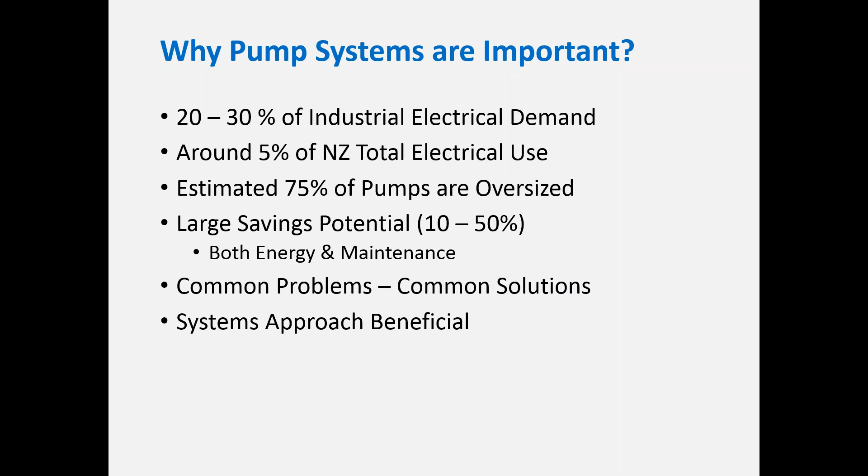There's large potential savings by sorting out these problems, and these problems are quite common and widespread, so they are fairly easy to solve if you're willing to put in a bit of time and effort. It's also important to view pumps not just in isolation, but to recognize that the pump is part of a whole system, including piping and control and other things. Taking a systems approach is really important, not just focusing on the pump. Today we're actually going to focus a little more on the pump itself, but remember that oversizing of pumps has to do with not really understanding the system well. We'll talk about that as we go through.

I keep putting this slide up around the study to show this is a big problem in industry. Many of our pump systems are affected by low pump efficiency and a lot of downtime due to maintenance. Things like seal leakage are really all symptoms of oversized pumps and off-design operation of our pump systems.

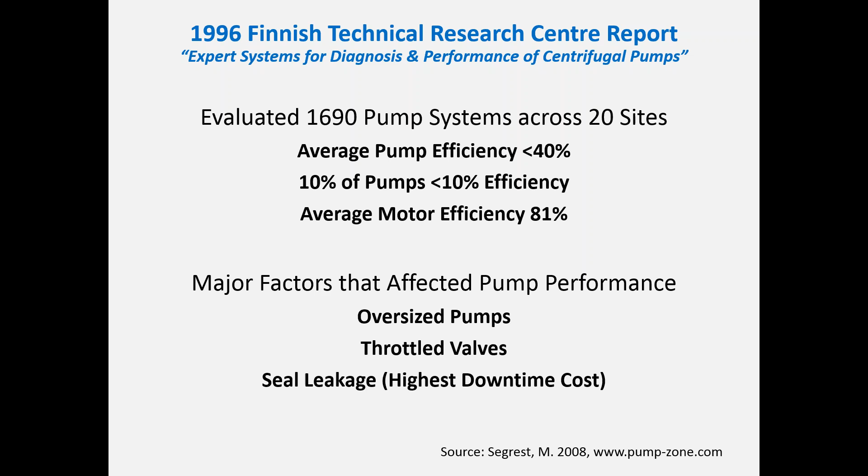So let's talk about what we mean by off-design conditions. What I'm going to do briefly is review our pump curve here. Sorry if this is going back to basics for some of you.

All of our pumps will have a pump curve, and it may be buried away in the archives, but this becomes a very useful, important piece of information to have. If we look at a pump curve in more detail, what it does is express where the pump will operate as a function of flow rate versus the head, or pressure, delivered by the pump.

In this particular case we have different impeller sizes, and that's the performance curve for each impeller size. Then we have these lines here - let me bring up my highlighter - these lines are lines of constant efficiency.

Okay, so if we're on that line - this line here, which is not always to be found, is the minimum flow rate that we need for our pump. If we operate below that line, there can be some very negative effects. We'll talk about that in more detail, but recognize that there is a minimum flow you need to operate your pump at.

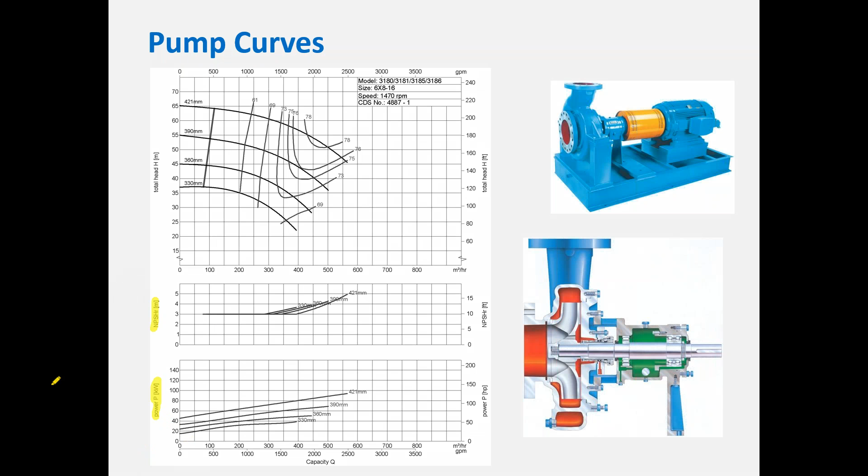So what the pump curve does is tell us about the performance of the pump and also its efficiency. Going back one slide, typically there's also information about the required net positive suction head for the pump as a function of flow rate, and often the power requirement as a function of flow rate as well. So there's a lot of information to be found on these pump curves.

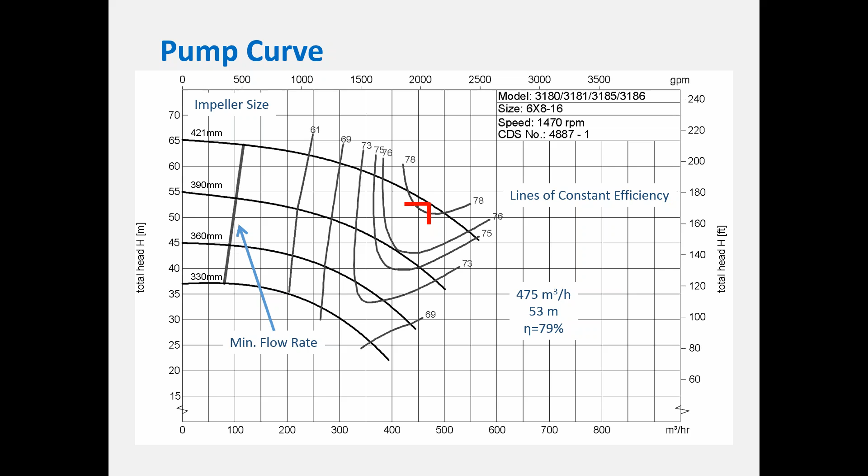And obviously we're operating at a point on that curve. For example, this is the best efficiency point on this curve, which happens to coincide at 475 cubic meters per hour. The head the pump will deliver is 53 meters, and the efficiency is around 79% - that's the pump efficiency. As we move away from that point, our efficiency drops, our flow rate changes, and our head requirement changes. We only operate on that particular curve.

Now the trick is to know where we're actually operating. The first thing to recognize is that we always operate at the intersection of our system curve and our pump curve - that is the operating point. Depending on what our system looks like, whether we have valves open or closed, that will change the system curve and change our operating point.

And we only move up and down the pump curve as we... sorry, I got muted for some reason. Can you still hear me okay? If you can't, please send me a message. Okay, thanks.

Okay, so we will only ever operate along the pump curve where the system curve intersects the pump curve.

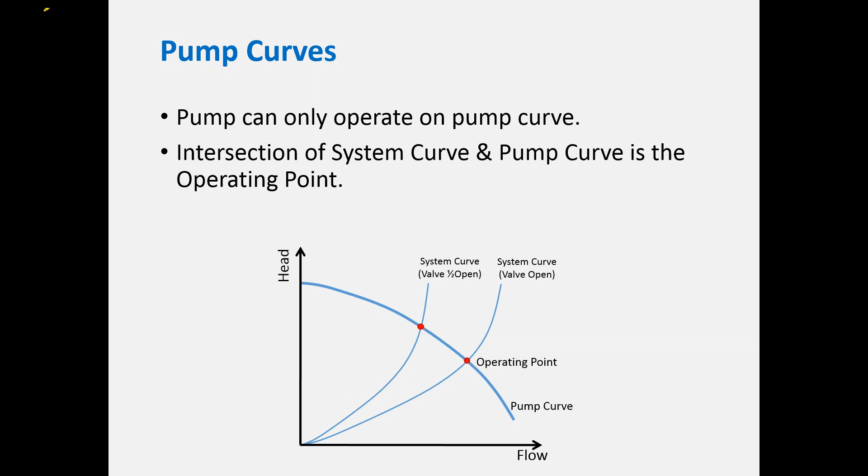So what we need to do now is define some different operating modes. We talk about continuous operation of a pump, where you can run the pump continuously and expect many thousands of hours of operation without any real damage or excessive wear of the pump or its components. Pumps are designed to operate thousands of hours without problems - that is continuous operation. We'll come back and talk about that in a moment.

Then we have what we call short-term or intermittent operation, which occurs during upset process conditions or abnormal operating conditions.

So we're really operating away from our design point, and what that does, and we'll see why that is a bit later on, is actually introduce premature wear into the pump because the flow within the pump and to the pump are not ideal. It hasn't been designed for those conditions, and as the name suggests, this is short-term or intermittent.

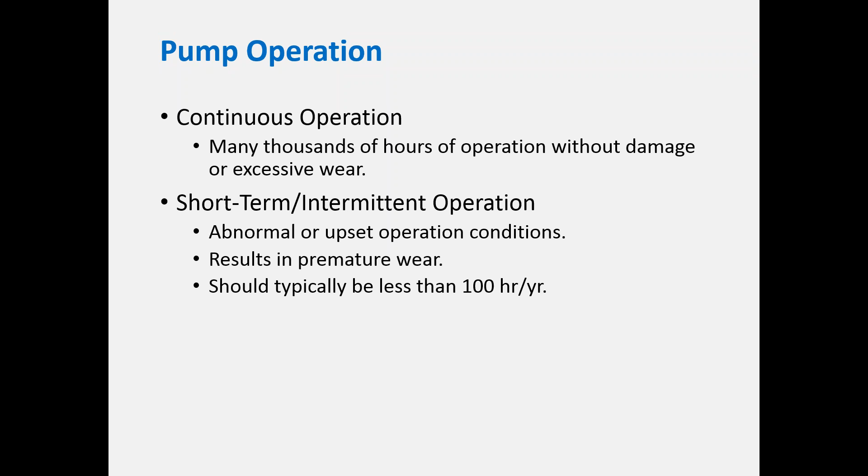So we wouldn't expect long-term operation under these conditions. People define what they mean by short-term operation differently, but typically you'd expect it to be around less than 100 hours per year. It may be more, it may be less, it really depends, but the concept here is we have continuous operation where we operate most of the time, and then we have these startup, shutdown, and upset conditions, and we really want to avoid operating there longer term.

The other third operation condition is minimum flow. As we said before, all pumps have a minimum flow that they need to see, and what that flow rate is really determined by three main criteria.

One is the temperature rise that we will get in the fluid, and we'll talk about that a bit later. The second is hydraulic consideration, so things like vibration and excitation forces.

And as we go through, we'll talk about non-ideal flow conditions, so the flow that is occurring in the pump when we have this reduced flow, especially below the minimum flow rate of our pump, and that can put huge stresses and vibration onto the pump because of the flow that's going on.

And then the third one is once we reduce down close to or below our minimum flow rate, the amount of cavitation can increase quite drastically, and the intensity of it also. So we can do some major damage to our pump, both the impeller and the housing, as we go below this minimum flow rate.

And so often that minimum flow rate is actually specified in the pump curve, but if it's not, there are some rules of thumb that you can then use to avoid that.

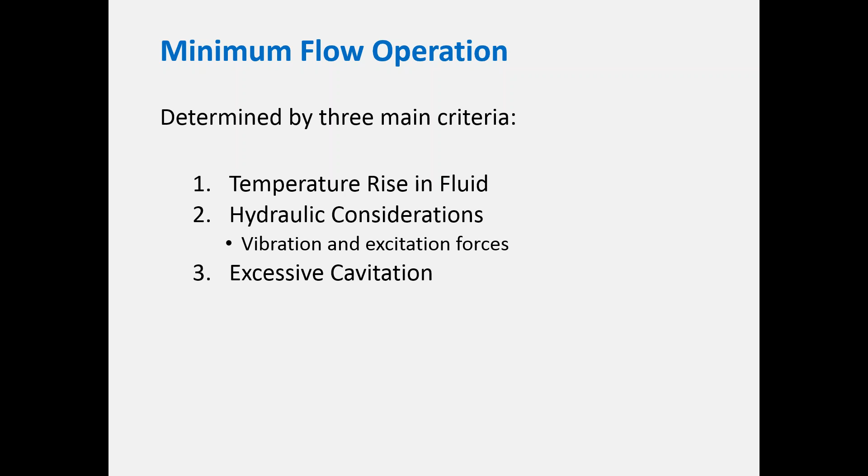So when we do our design of our pump system, we need to select a pump, and so for our flow rate and our head requirement, we have our pump operating at that best efficiency point or very close within that range there.

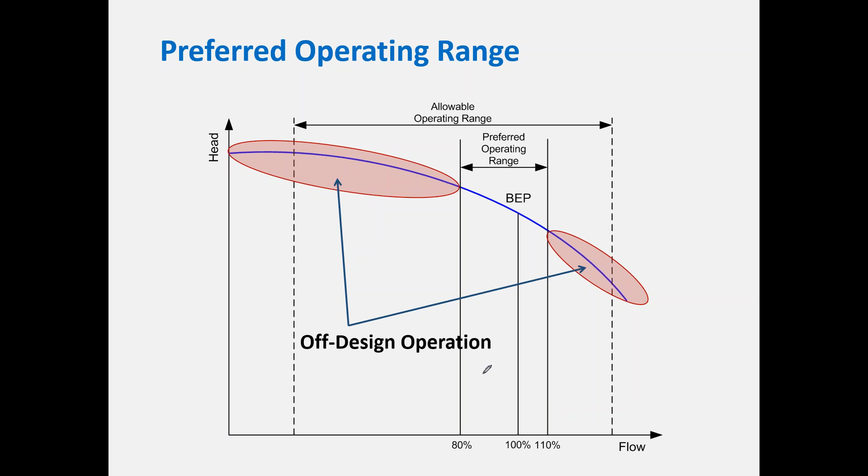So as I just said, for continuous operation, most of our operation of our pump system ideally should be in that fairly narrow range on our curve there.

For short-term operation, this is actually a very small percentage of the total operating time, things like startup, shutdown, process upsets, things like that. We can operate in these regions here without too many negative effects, as long as it's short-term or intermittent.

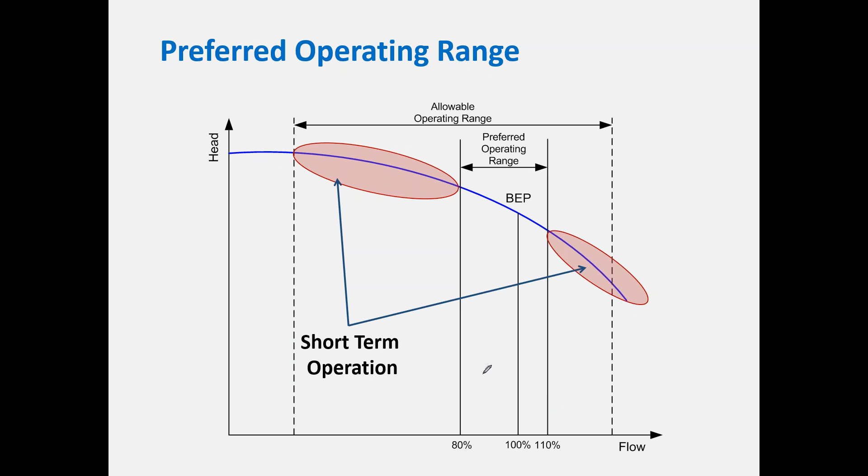So that's really short-term, and obviously we want to avoid being in this region here below our minimum flow. If we're operating in that, then that's bad news, and we actually need to design systems and control measures in order to avoid that. For example, often a bypass will be installed in order to make sure that the minimum flow rate is obtained even when process demand is lower.

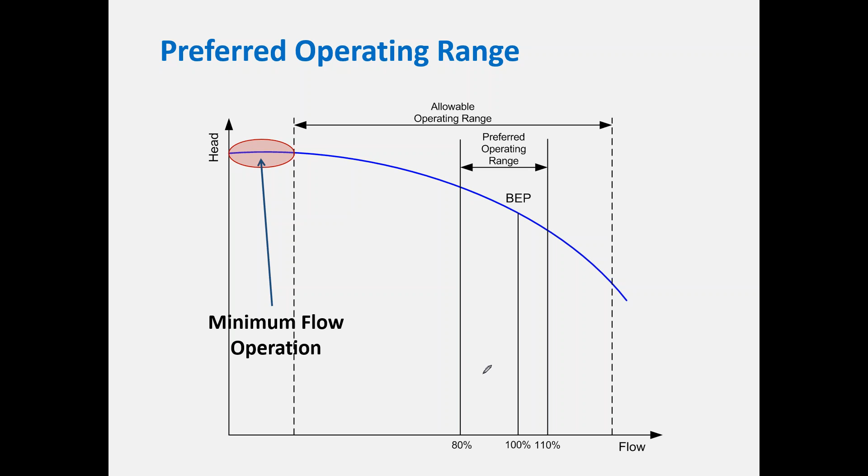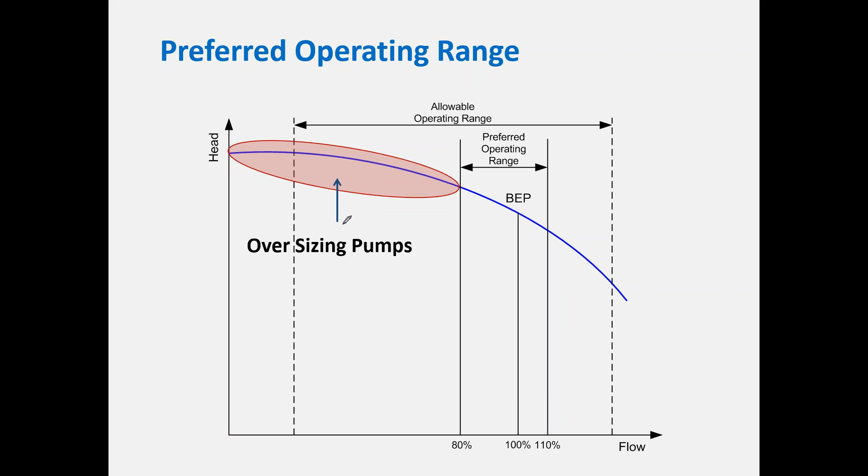Now, we talked before about oversizing and how that's a major problem. Basically, when we oversize a pump, we end up operating somewhere in this region here, and that becomes a problem. We'll talk about the effects of oversizing and these non-ideal flow conditions.

So before we move on, let's talk about why so many pumps are oversized and we actually end up operating continuously outside of our preferred operating range.

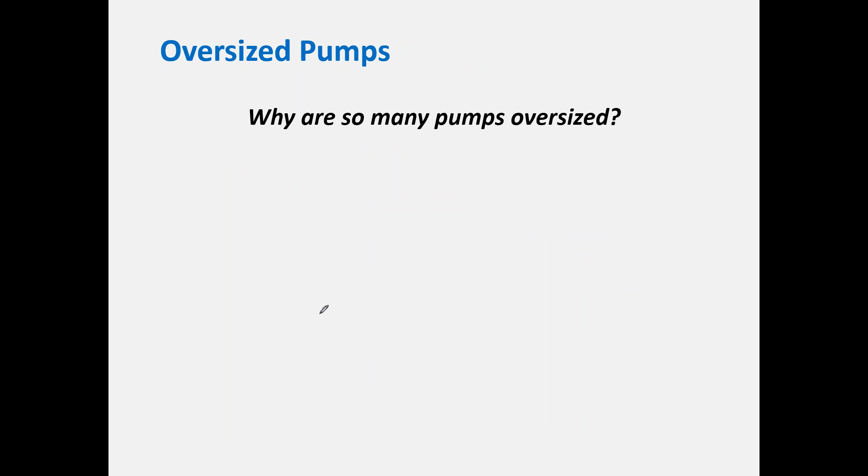First of all, often designs are future-proofed, because we're going to expand our production facilities, or demand will expand in the future, so we size a pump that is bigger to anticipate any future production increase. Now that may or may not happen, but a quick life cycle or total cost of ownership analysis can show what the actual economic cost is in oversizing a pump for the future.

And often what you find is there are ways that you can still achieve good operation of your pump and also future-proof your design. For example, you may specify a larger pump housing and have a smaller pump impeller that can be increased later on, and you can quickly do the cost-benefit analysis of that if it's a real issue.

But often that's put up as a bit of a smoke screen. The second one is safety factors or anxiety factors, where we're not too sure what our demand is going to be, and often that has to do with the head requirement. Our flow requirements are usually fairly well defined, so if we're not careful, safety factors can be added in, especially if different people along the chain, like the design engineer, the consultant, and the supplier, each add their own safety or uncertainty factors. Then we can very quickly end up with an oversized pump, and it doesn't take too much additional safety factor to get quite far away from the best efficiency point.

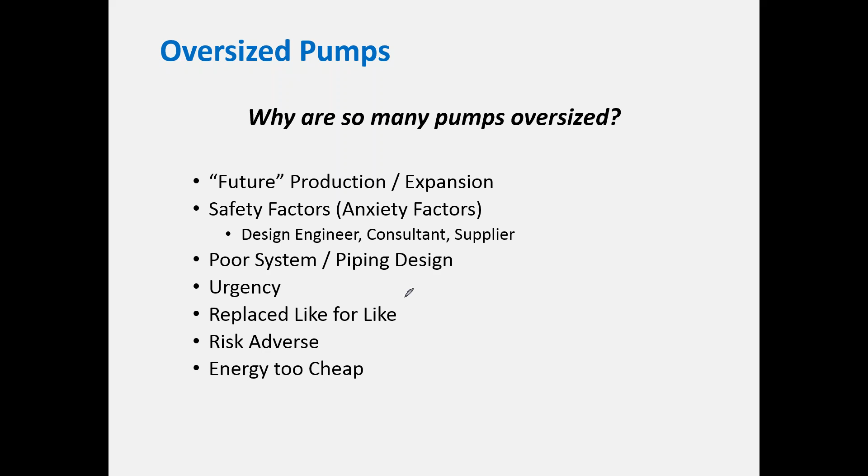Certainly, if you put a VSD on an oversized pump, especially for a new build, then there's a lot of extra capital tied up that doesn't need to be there with a correctly sized pump. That's something we're going to talk about a little more later in the year—the advantages and disadvantages of variable speed drives, and when they're ideal versus when there are perhaps more efficient and cheaper options. But that's a good point, Paul, and we'll get to that a bit later.

Now, previously, when we've talked about identifying pump systems that are potential candidates for energy reduction, we've talked about some indicators for inefficient systems, things like throttled pumps, pump systems with bypass or recirculation, multi-pump systems, etc.

The ones I've highlighted in bold here—throttled pumps, cavitating pumps or valves, high vibration, noisy pumps, pump systems with high maintenance requirements, and systems where flow or head from the pump have degraded over time—these are actually indicators that you're operating at these off-design conditions long term. This isn't just short-term operation; you're actually operating away from that preferred operating range longer than you should be.

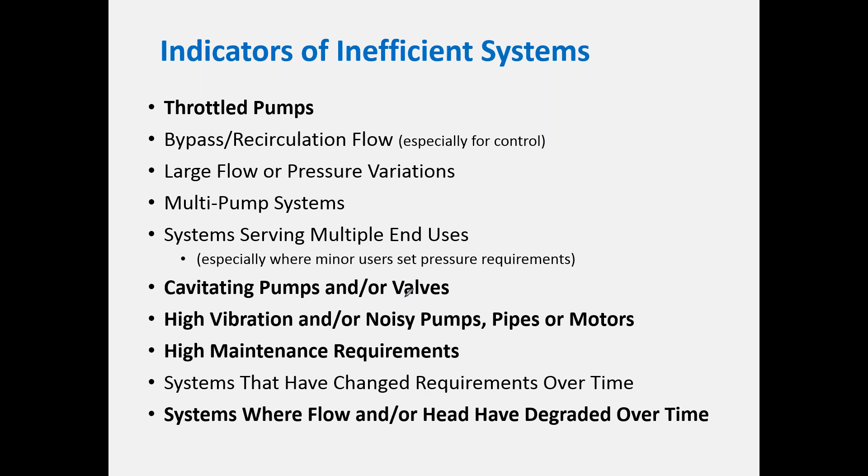When you operate your pump at these off-design conditions, there are a number of non-ideal flow conditions that occur within your pump. We'll talk about those, but if you think about pump design, what the pump designer is actually trying to do is design a pump that is robust and reliable, but that will operate at a certain point in the most efficient manner.

So what they try to do is minimize the losses in your design. There are a number of different losses that make up why we have a pump efficiency: mechanical losses, leakage losses, recirculation, and hydraulic losses. We'll briefly go through each one of these.

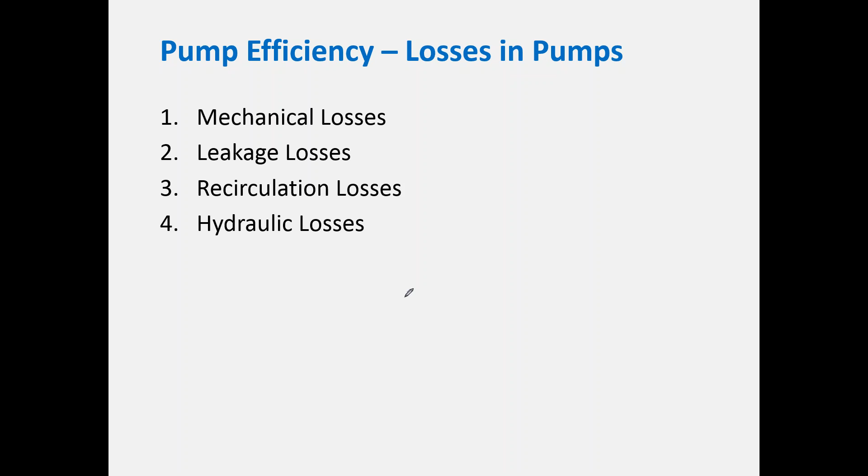Mechanical losses are things like mechanical friction in your bearings, your seals, and all of the mechanical components. There are frictional losses to do with that.

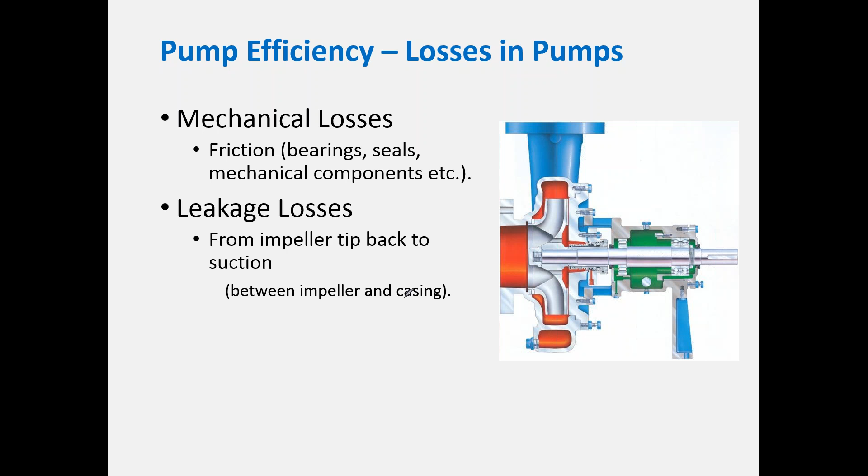The second type of loss is leakage losses. You actually need some clearance between your impeller and the pump housing or casing, so there is a small amount of fluid that leaks between the impeller and the casing. But in the design of the pump at a certain flow rate, you're trying to minimize those leakage losses in order to improve pump efficiency.

The third type of loss has to do with recirculation. You can get recirculation of fluid within both the suction or inlet of the pump impeller and also the discharge, because of velocity differences between the impeller and the vanes and things like that. That is another form of loss, and the designer is trying to minimize those.

And that is how we get this best efficiency point. Then finally we have hydraulic losses - this is all of the friction between the fluid and all of the components of the pump. It's sort of analogous to pipe friction. We have all of these frictional hydraulic losses due to pump fluid interaction. When the pump is designed, those factors are trying to be minimized in order to have the maximum pump efficiency.

But as we move away, obviously the pump is fixed, and so as we move away from that best efficiency point, these losses are going to increase. Especially things like recirculation and leakage losses tend to increase as we move away from this best efficiency point.

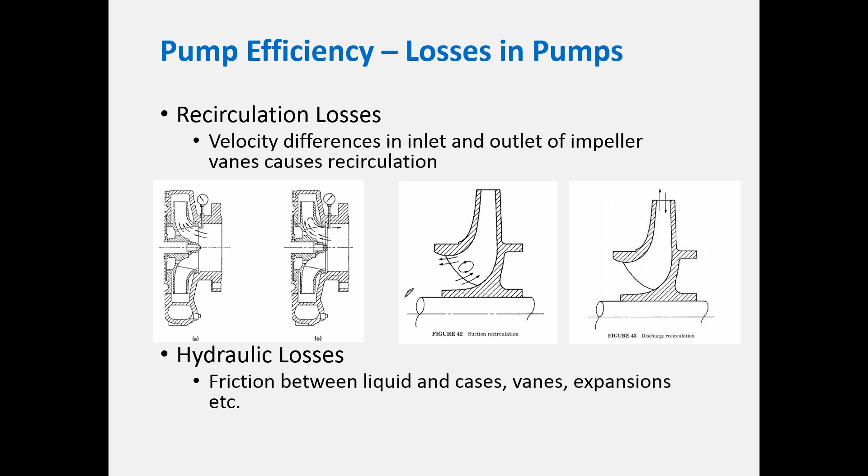So there are six things that arise from these off-design conditions, this non-ideal flow. We'll talk about each one briefly. One, we operate at less than our best efficiency, and there are some energy consequences because of that. We'll talk about radial thrust - we change the forces that actually act upon the pump and the impeller itself. We'll talk about temperature rise in the fluid, especially below this minimum flow.

The fourth one, which is really a big one, is around internal fluid recirculation within the pump, we'll talk about that. With high specific speed pumps, so these are your axial pumps, your motor can become overloaded pretty quick, and we'll talk about why that is. And then finally, if entrained air or gas is an issue, operating at non-ideal flow conditions can aggravate that, and we'll talk about what the effects of air in your pump is.

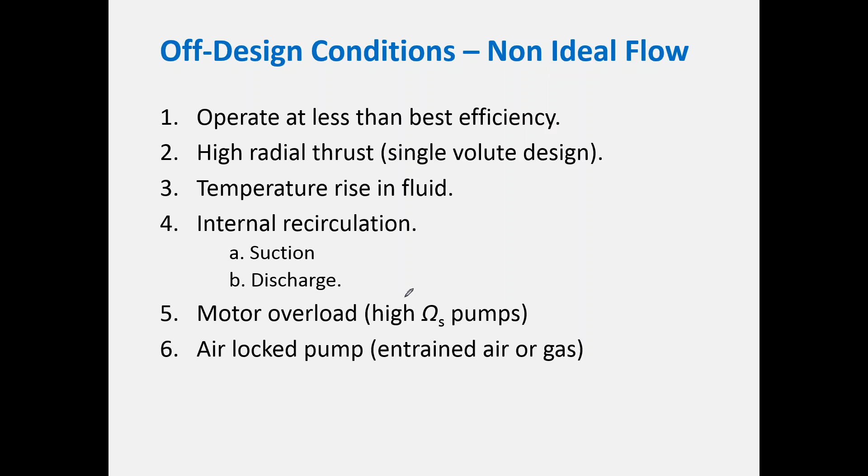So first of all, as we operate at these off-design conditions, we move away from our best efficiency point, and so we're going to use more power or additional energy than needed in order to pump our fluid. There is an energy penalty which ultimately leads to an additional cost.

This is suboptimal operation, and there is a financial cost of operating away from here, not just in energy, but also in maintenance. All of these non-ideal flow conditions actually reduce the reliability of the pump, and it can be quite a severe reduction in reliability. Typically you have an additional maintenance cost that needn't be there if you were operating within that preferred operating range.

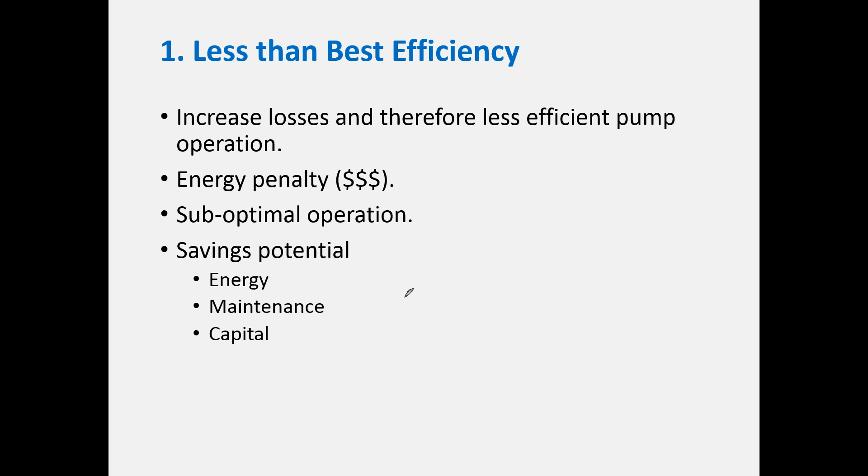The other effect on expenditure has to do with capital. If you're oversizing pumps, especially significantly, bigger pumps tend to cost more money, so there's additional capital expenditure that you didn't really need to have - especially if you have to go and put a large VSD on your pump in order to reduce it. There's additional costs that may not have been incurred if the design was done correctly to begin with. So there's a real financial penalty as we operate at these off-design conditions and outside of that preferred operating range.

Okay, the second thing: as we move out of that preferred operating range, our radial thrust on the impeller can significantly increase. So when we're operating at our best efficiency point, we have uniform radial thrust on our impeller.

But as we reduce our flow rate, that's our Q, the pump's hydrodynamics, which was designed to get uniform radial thrust at the best efficiency point, now produces non-uniform forces. So our radial thrust on the impeller is now non-uniform, and we get a force that acts upon it, which then puts additional forces on our shaft and our bearings.

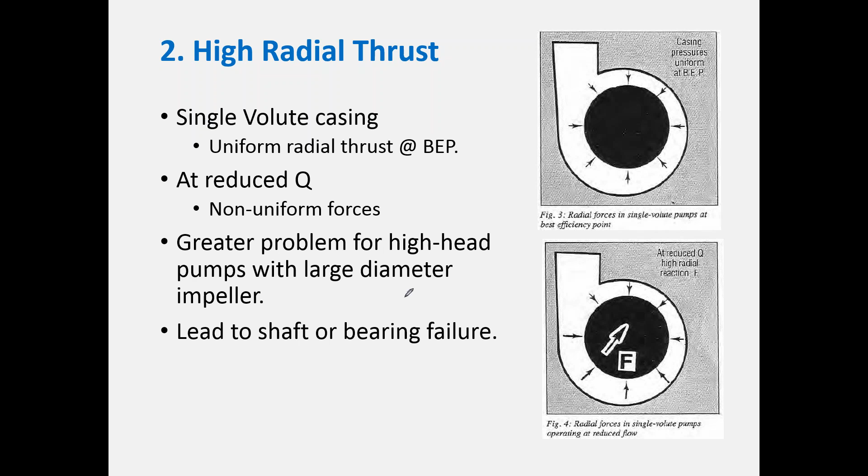So that tends to, especially in bearings, lead to accelerated bearing failure, especially if we have high head pumps with large impellers, where the radial thrust on the impeller can be quite large. So this is one of the sources for reduced reliability of our pumps at off-design conditions, as we have much higher radial thrust on our bearings and shaft.

So if we just look at some numbers - let me get my highlighter. Here at 100%, that's our best efficiency flow rate. So if we have our full speed pump with a single volute, our average radial thrust as a percentage of the maximum is fairly modest, sort of down at 10% of our maximum.

But as we move away from that, this curve increases quite dramatically. For example, if we're at 60% of our best efficiency flow, we're roughly at about 60% of our maximum radial thrust. That's a six-fold increase in the thrust that our impeller is seeing.

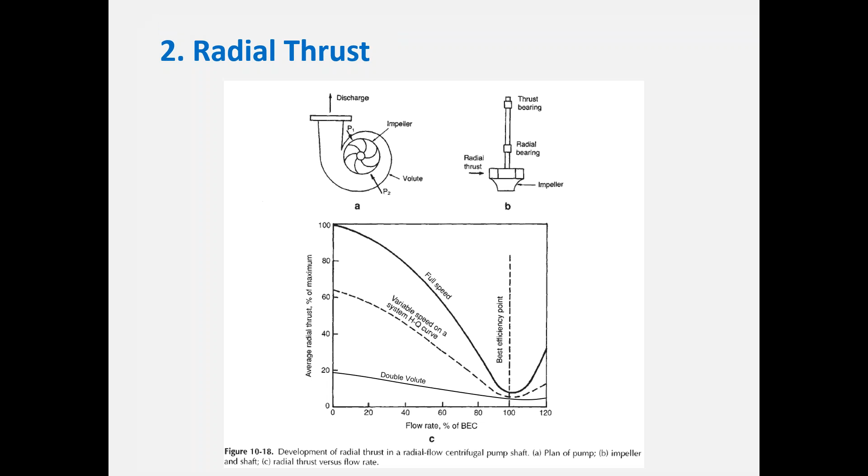Now the third issue we can run into, especially as we get close to our minimum flow rate, and especially if we deadhead our pump, is that the pump is still operating, putting a lot of energy into the impeller which is turning the fluid, and if that fluid isn't able to move out of the pump, that energy has to go somewhere. It goes to a temperature increase in the fluid and also the pump itself, the housing and the material.

And that can be a major issue, you want to avoid that. In most instances you want to avoid increasing the temperature of your fluid rapidly, especially if the fluid is volatile. What you're really trying to do here is avoid flashing the fluid in the pump. When you flash a fluid you have a huge volume change, and that's never good for your system, having that large temperature rise and then flashing your fluid.

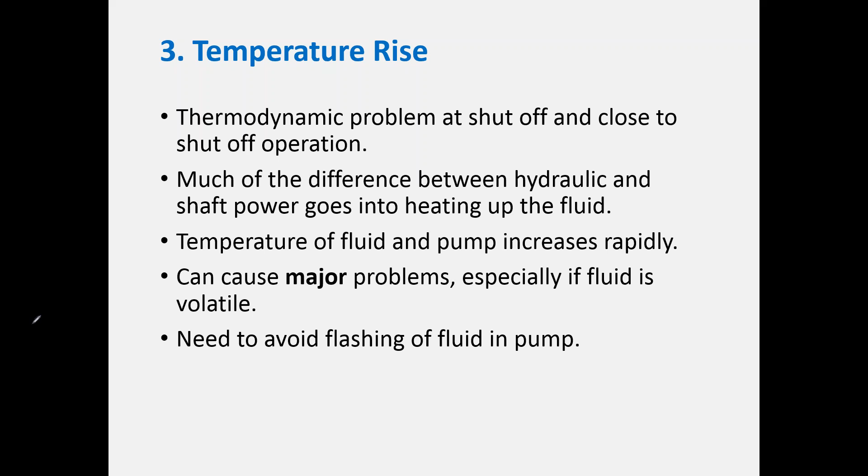And just to give you an idea of the scale of the problem, it can be quite major - the rate of temperature increase can be very quick. So this formula here, I've got the units in brackets, it's important to use correct units. The temperature rise in degrees Celsius per minute can be estimated by this equation.

Basically, P shut is the power at shut off, which you can get from the pump curve, and that is divided by the mass of the pump - the actual pump itself, how much it weighs - the specific heat of the pump material, if it's cast iron, and also the mass of the liquid in the pump and the specific heat of the liquid.

Now, if we ignore the pump, the increased temperature in the pump itself, and we just focus on the liquid, that simplifies things quite a bit. Then basically we have the power that the pump will be drawing divided by the mass of fluid contained in the pump and the specific heat.

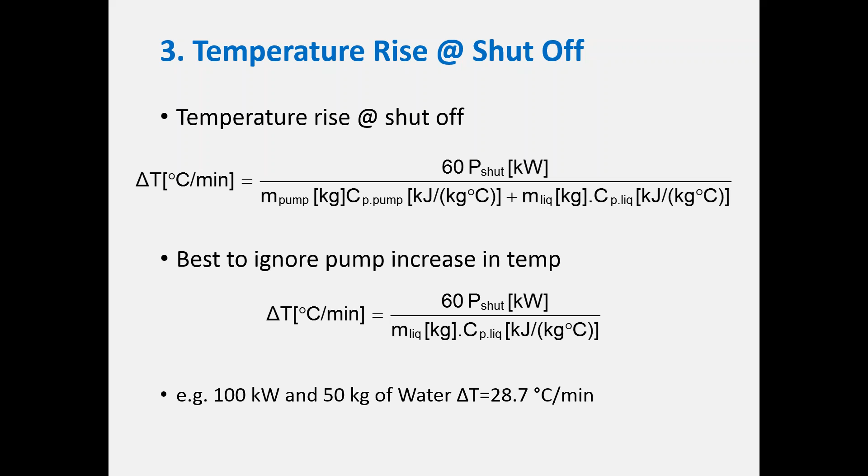And so, if we are operating close to this point, close to our minimum flow rate, then it really pays to have a really hard look at what the consequences are if this goes wrong, because the temperature rise can be significant. Especially if you have a volatile fluid, bad things can happen. So this is one of the reasons we actually want to be out of that range, because this is a potential problem as well.

Okay, the fourth. Paul, you should be on number 4 now, internal recirculation.

As we move away from our best efficiency point, what happens is we get recirculation of the fluid both at the suction, or the inlet, and also the discharge of the impeller. And that can start fairly early on as we move away, and it can progressively get more severe as we move away from our best efficiency point.

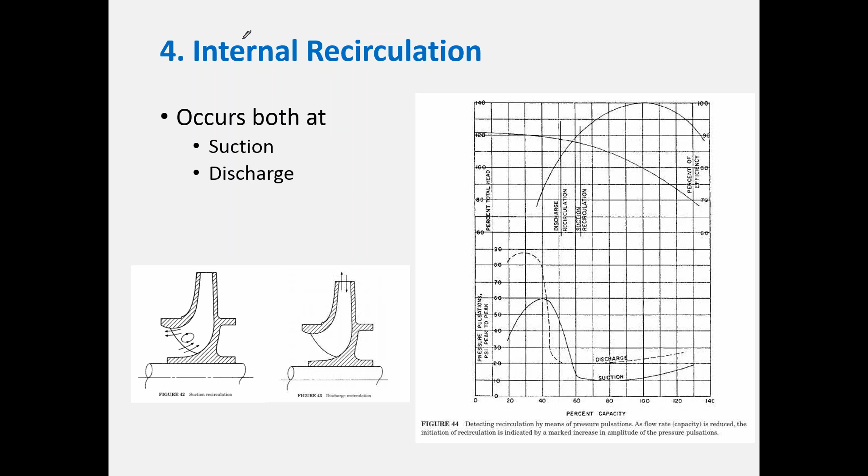This is a little bit hard to see on this slide, but here we have the casing of the pump, and you can see the streamlines as we come through. Here, if I get the highlighter out, here's the impeller. So this is obviously rotating, and we've got our fluid.

And when we have suction recirculation, this here, we get these eddies or vortices that happen at the suction, and they can be quite severe, and we can also have them occur at the discharge.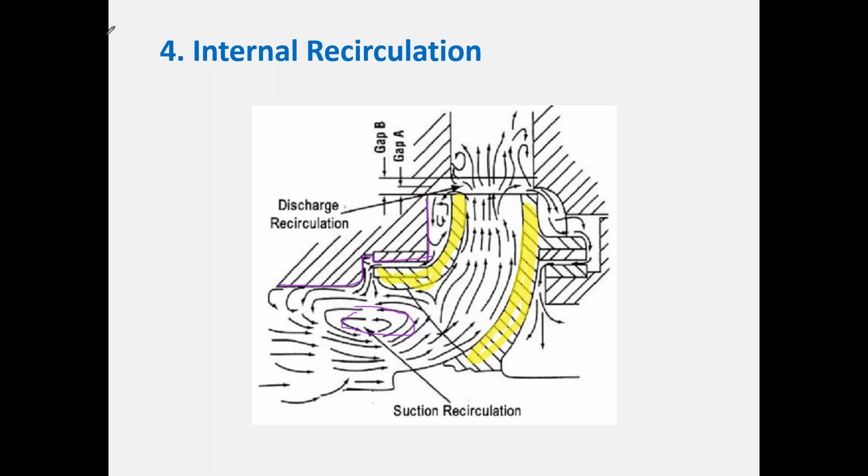Now you might think, well, why? Who cares? Why is that a problem? These can be very intense, and the velocities at the core can be very large. And you'll recall, if we talk about Bernoulli's equation, when we have a high velocity, we have low static pressure. So what happens is if we lower our static pressure due to high velocities in a vortex, then we can have severe and intense cavitation.

Also, we can have pressure pulsations as well, and lots of noise. And if you go onto YouTube and type in 'pump suction recirculation', there's a very good video, I think from Ingersoll Rand, where they actually show you can visualize this suction recirculation, and it can actually extend quite far back into the suction piping. So it actually can extend further than the pump, and you can get quite large pulsations, lots of noise, and lots of intense cavitation, which then can damage your impeller and things like that.

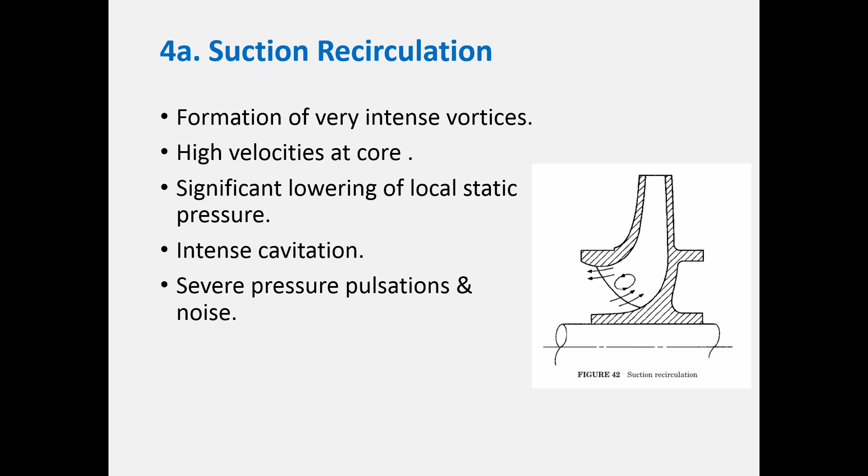And so often a lot of the cavitation that we find in pump systems isn't actually due to a net positive suction head issue, but has to do a lot with recirculation and operating away from this preferred operating range.

Now, as the impeller diameter is increased, what happens is the required net positive suction decreases. And so this all affects the flow in the impeller, and when that occurs is actually quite dependent on our impeller design.

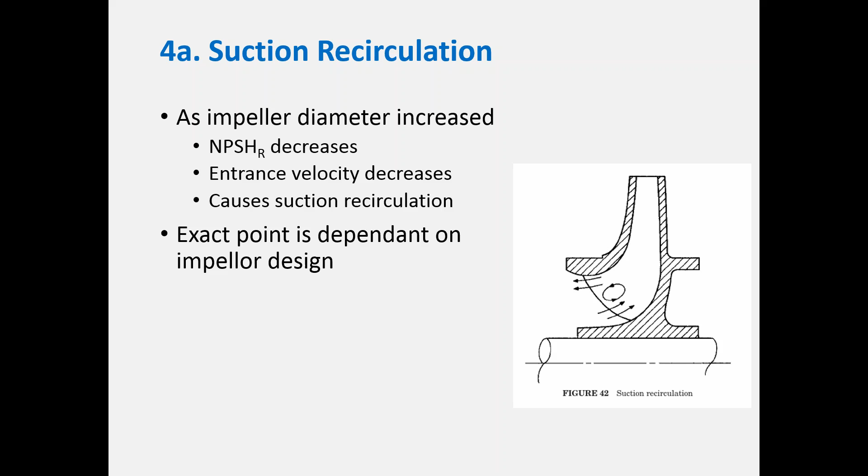And so what this does is it affects our required net positive suction head, and we'll talk about net positive suction head and cavitation in another webinar in the future. But this can have a very negative effect, and we can have some damage due to this cavitation on our impeller. And where that damage occurs is actually a very good diagnostic tool as to what's going on in our pump and some of the problems we're seeing.

And so because you have this recirculation here, you get this stalled area of flow, and this is where the cavitation occurs. And so all of the damage from suction recirculation actually occurs on this side of the impeller. If it's cavitation from a net positive suction head issue, the cavitation actually occurs on the other side of the vane.

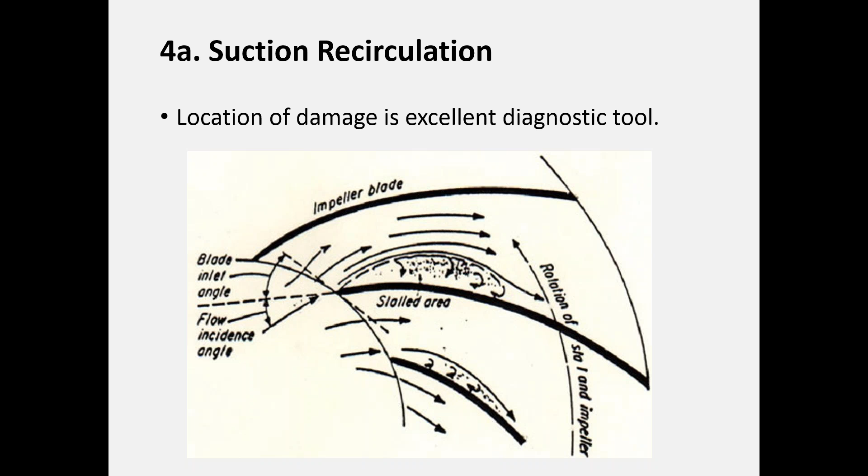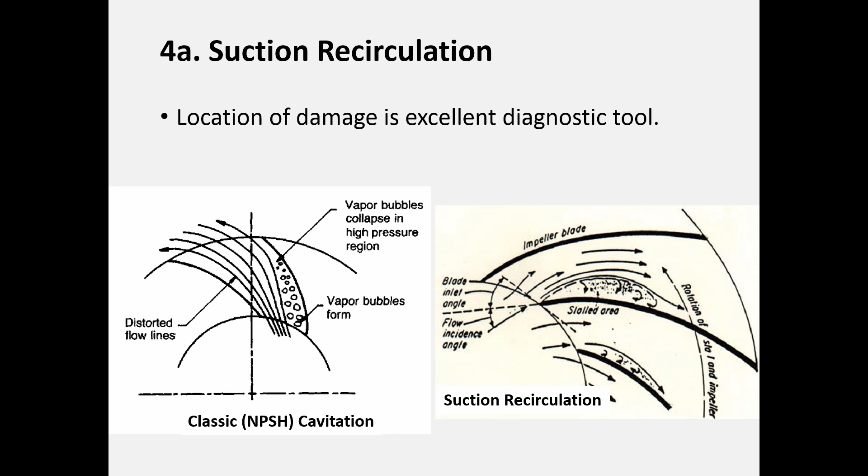I've got a better picture coming up of that, where if we have what we call classic cavitation, or net positive suction head cavitation, the vapor bubbles actually form on the other side of the vane, and then they damage that side of the vane. If we have suction recirculation, it occurs on the other side. So that's a very good diagnostic tool, is when you're examining your impeller, especially if there's damage, is where is that damage occurring?

So here it is in a different way. As we move away and we have discharge recirculation, as we move further away from our best efficiency point, then that stall region moves further towards the discharge, and we actually get cavitation occurring at the discharge end of the vane. But it's on the same side as you would find your suction recirculation. So this is a very good way of determining what your problems are within your pump, is if there is cavitation damage, where is it occurring on your impeller.

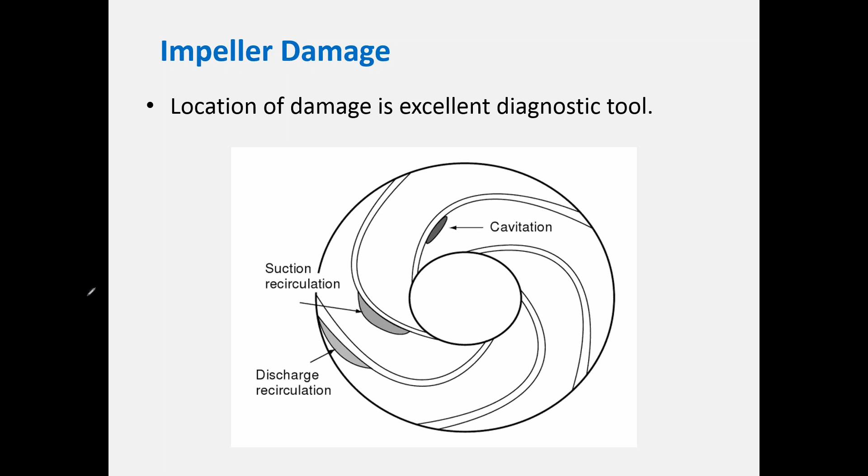Now, discharge recirculation has its own effects as well. It can cause instability in the axial position of the rotor, especially for double suction pumps, this is a big issue. If you have a high specific speed pump, so more of an axial type pump, then what can happen is you can have your motor overload at low flow rates, and we'll talk about that in a moment.

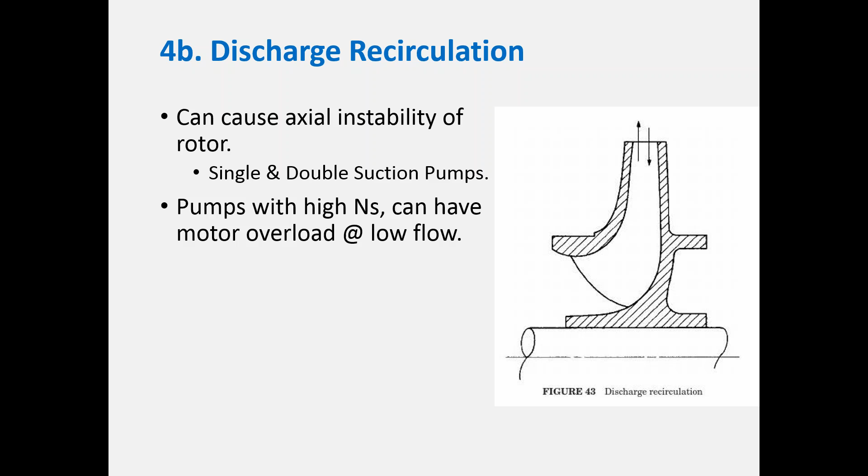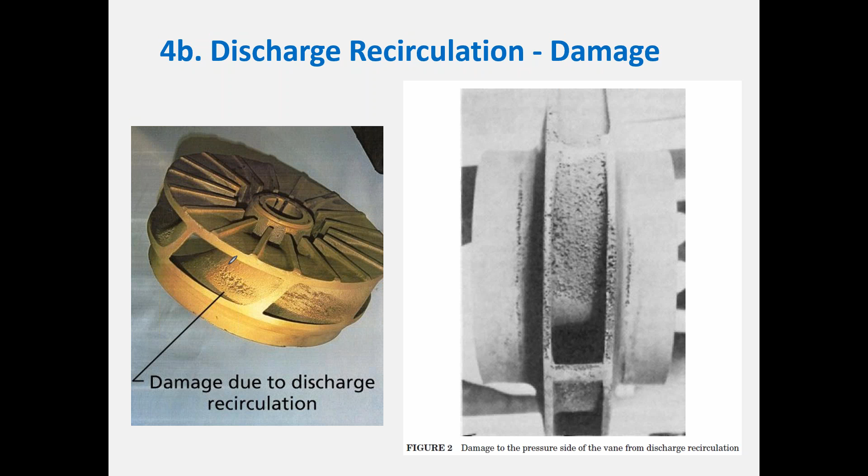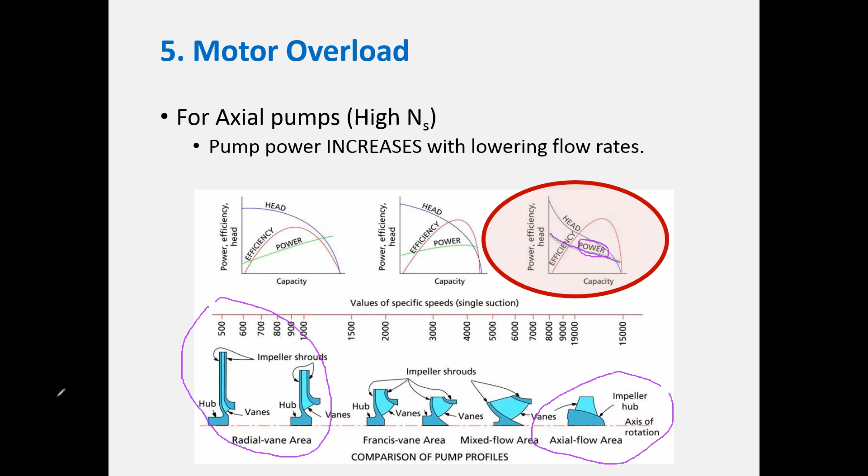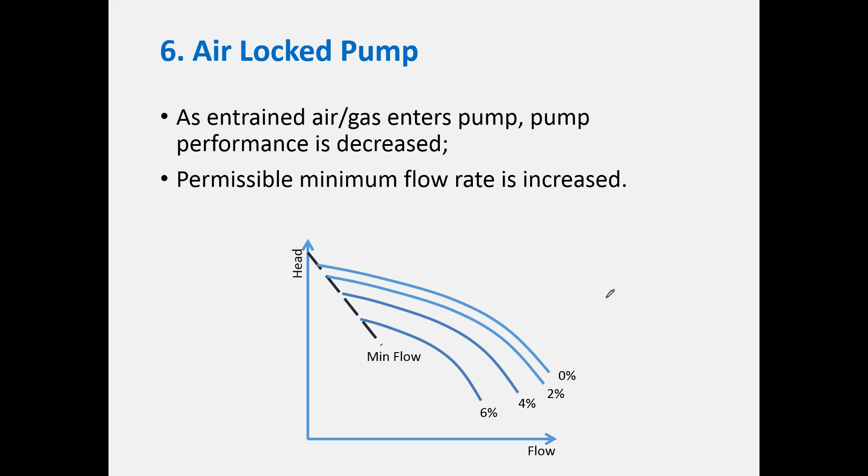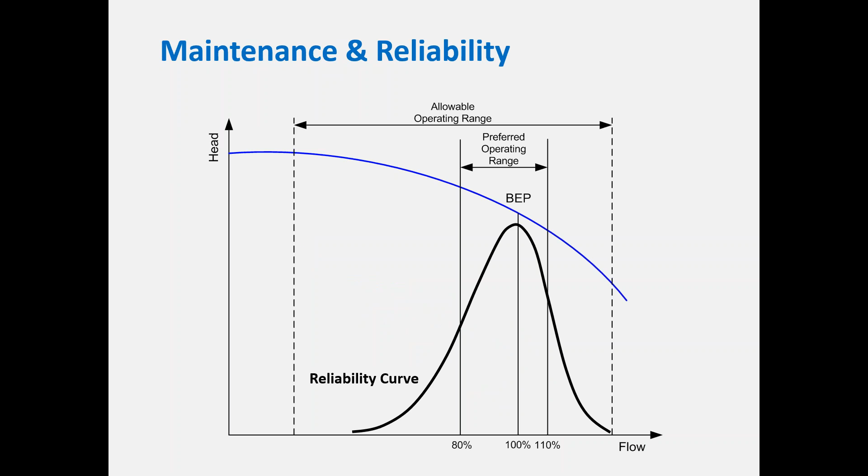So these 6 factors, as we've already talked about, can affect the reliability of our pump. We can put a reliability curve on there as well, and as we get out of our preferred operating range, these factors start to play more and more of a role, and things like our bearing and seal life are negatively affected, which reduces our reliability.

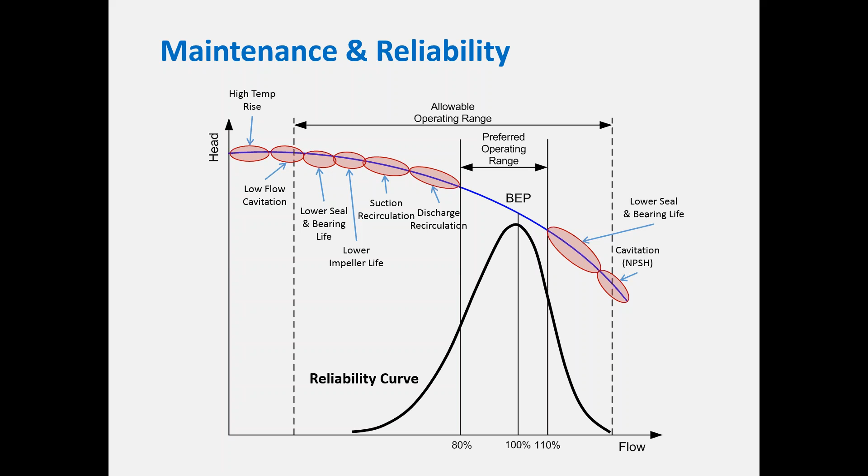Pumps that have significant reliability or maintenance challenges—this is often a reason why: you're operating out of this preferred operating range for significant amounts of time.

So what are some of the remedies? Well, for new systems, obviously avoid oversizing pumps to begin with. We'll probably have a future webinar that talks about oversizing and how to avoid it, and how to deal with uncertainty in our design. But if we avoid oversizing to begin with, we can avoid many of these problems.

Really, the key in order to do that is to understand both our flow and our head requirement. What is our flow profile? Is it just a continuous flow rate, or does it change over time? The design of our system, especially the flow control system, is really dependent on what that flow profile is.

Obviously, if you have a system with a very constant flow rate, then you don't really need a VSD—you can get away with just having a correctly sized pump. However, if the flow is highly variable, then having a variable speed drive or multiple pumps can be a way of dealing with and having an efficient system while also meeting the flow requirement. So understanding the flow and head requirements, how those change over time, and then selecting the appropriate flow control method is really how to avoid these off-design conditions for new systems.

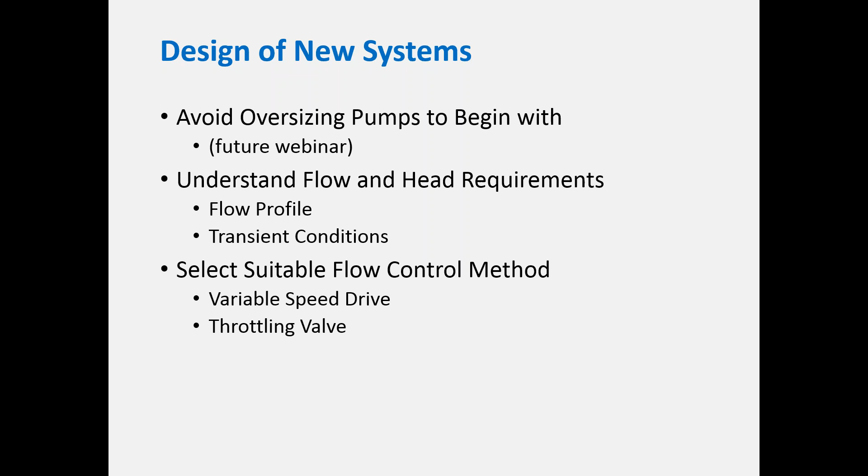That's well and good, but for retrofit of existing systems, how do we solve an existing problem? Well, the first thing I'd suggest is to actually conduct a pump system audit. Look at the system, look at what the flow profile is, what is actually the demand of the system, whether it's an industrial system or a municipal water supply. How does our demand change over time, and what are the transient conditions that occur?

Once you understand that, you can identify how do we go from what we currently have, and what's the solution for that? Often, simply replacing the pump may not be an economic option. So depending on the situation, things like a variable speed drive might be an appropriate solution, especially for a variable flow profile. If you have large changes in your demand, then a variable speed drive is often a very good solution.

But remember, there are issues with that. If you have systems with high static head requirements, then implementing a variable speed drive requires some cautions that need to be followed in order to do that correctly.

The other option, and certainly for town water supply and things like that, is multiple pumps used in the system in parallel, so you can actually have very good control—sort of smart pumping—by using multiple pumps that come on and off as needed.

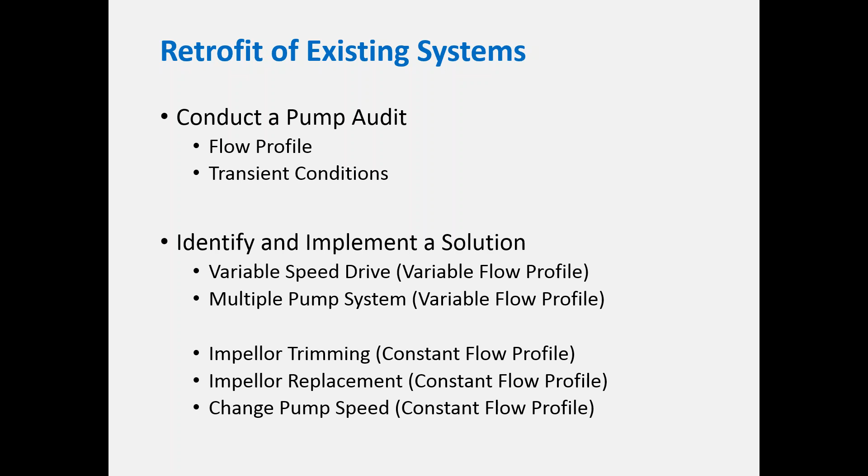Okay, so some additional information.

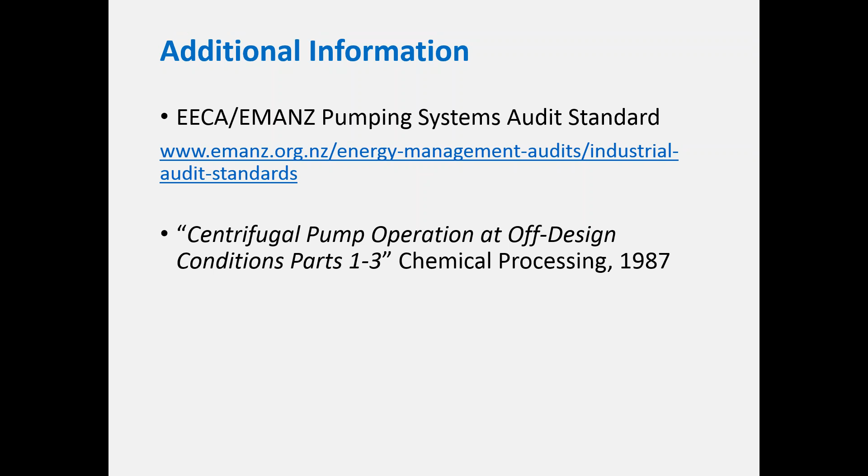There is a New Zealand pumping systems audit standard with some quite useful information, developed several years ago by EECA and EMANZ, and that is freely available there. There's also a very good three-part series about off-design conditions and some of the things that go on - if you Google that, it's fairly easy to find. If you can't find it and you're interested in some bedtime reading, please let me know and I can send you a link.